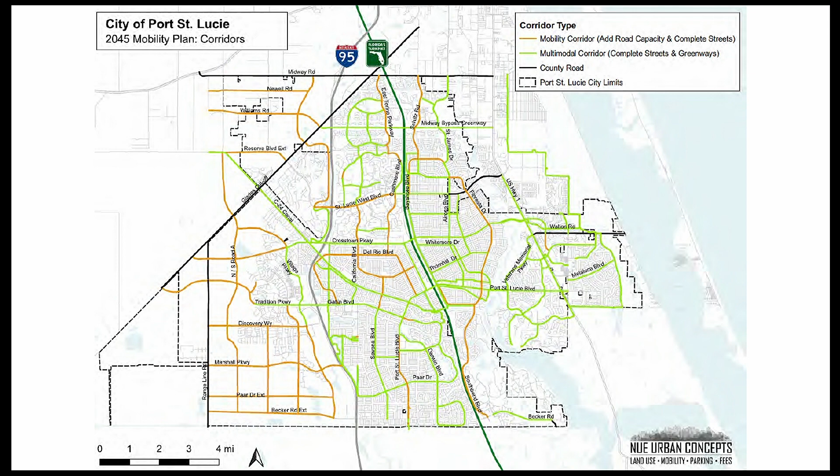Next slide, please. This plan gets into more detail, showing where we're adding a center turn lane, similar to what the city has done on Floresta Drive. The dark blue lines show where there's a proposal to 4-lane the roadways in the future. Ultimately, if needed, St. Lucie West and a portion of Village Parkway in the western part of the city are slated to be looked at for 6-laning in the future.

The orange color represents new complete streets, showing the entire gridded network that's been in place for years in terms of development, building that network as they move forward. In the future, there may be plans to 4-lane some of those roadways. The corridors shown in green are all areas needing multimodal improvements: sidewalks, bike lanes, multi-use paths. All of this is detailed in the mobility plan itself.

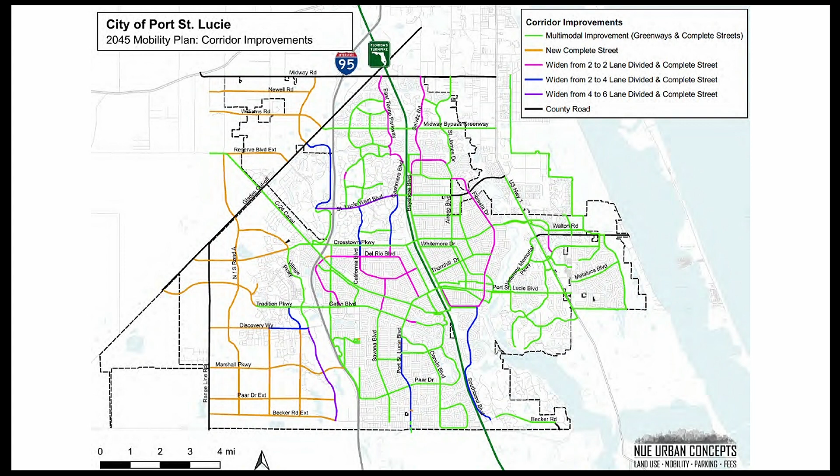Next slide. We also looked at establishing, in terms of getting around the community, what should be the principal multimodal routes within the city. That helped develop the overall prioritization. As the city looks at multimodal improvements, the corridors shown in light green or aqua are the main mobility corridors within the city. The secondary network, shown in dark blue, represents opportunities to expand or build those roadways and multimodal facilities — definitely important, but the backbone of the system is really those major corridors like Port St. Lucie, the Greenways, and portions of Floresta that the city is already improving.

Next slide. Jonathan, before we move on — this is Stephanie Morgan. What is the principle you're denoting there? You have the county roads as black and the principal routes as lime green, yet Glades Cutoff is cut off in the lime green with just a small portion in black for county.

We have, and that's something we've kind of left in there for discussion purposes — the longer-term potential to have a coordinated trail with the county along Glades Cutoff, not any type of roadway improvement, but a multi-use trail along that corridor. That's something we'll look at further. This map was intended to remove all the county roadways, so that may have been one of the corridors we need to go back and correct. We did have in the mobility plan a proposed multi-use pathway along Glades Cutoff, connecting those two major sections.

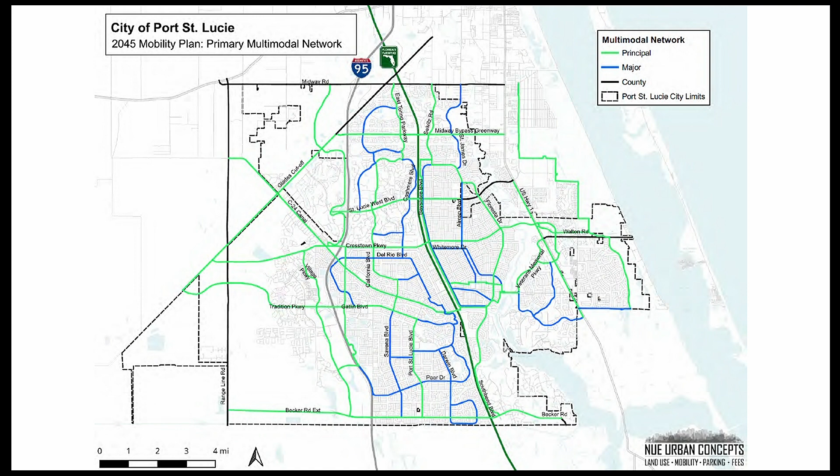This is a more detailed look into the overall mobility plan for the multimodal facilities. The prior map just labeled them in terms of priority, but this gets into the definition of where we're looking at a shared use path, a multi-use trail, a sidewalk, and a multi-use pathway. This gets into a lot more detail on those overall corridors and the type of multimodal facilities that are proposed, and again these are an ideal situation.

Each corridor will go through a separate design phase, and as they go out there and do right-of-way surveys and stormwater surveys, some of these facilities may have to change due to right-of-way constraints. But in the ideal scenario, with the right-of-way as we know it today, these would be the ideal multimodal improvements on these corridors. We'll also look at the Glades Cutoff to make sure that map is updated appropriately to not have a county facility on it.

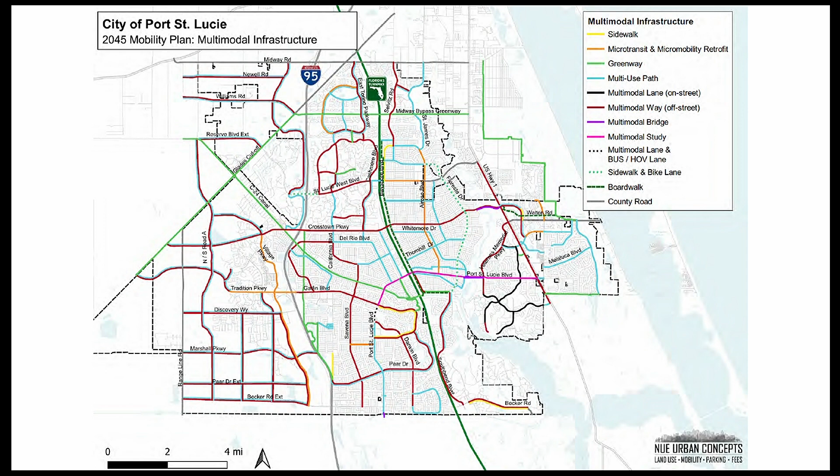We also looked at intersection improvements throughout the city, similar to the corridors. We identified ones that needed capacity improvements for cars, and ones that needed safety improvements for multimodal accessibility.

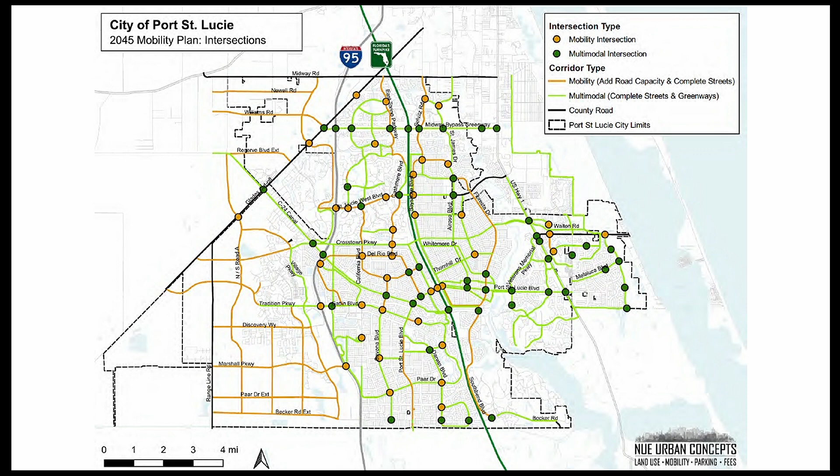Similar to the other maps, this is a much more detailed version. Road capacity, shown in red, is where there's an actual need for additional turn lanes. Orange is where there's a need for curb ramps, updated sidewalks, and other multimodal improvements. We also looked at roundabouts coordinated with Public Works at a number of intersections throughout the community.

And then longer term, we're still leaving in the possibility for a partial interchange at the Marshall Parkway and I-95 interchange at some point in the future, and also a revised interchange at Port St. Lucie Boulevard and the Turnpike, as well as some multimodal overpasses or underpasses as they make improvements to the Turnpike in the future.

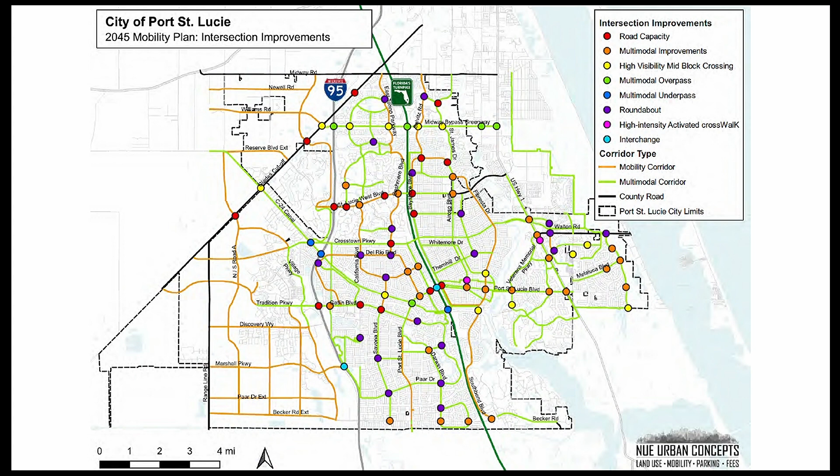Next slide. We also took a look at transit, not necessarily in the traditional sense of a 40-passenger bus, but something more in line with either a tradition shuttle or another type of service that a number of communities are rolling out, like neighborhood electric vehicles. Some people refer to them as souped up golf carts, but they carry up to 7 or 9 passengers, and there are private companies starting to run them within cities, also looking to run them on multimodal pathways.

So this could be a combination of that type of vehicle, a golf cart, or autonomous transit shuttles. We also looked at the possibility of using the St. Lucie River and existing canals to connect some of the parks and destinations within the city on both sides of the river via a water taxi. This exists today in Fort Lauderdale and in the city of Tampa. We've integrated this, and it's starting to happen in the city of St. Augustine as part of their mobility plan. I also looked at Walton County and Seaside in the Panhandle as part of their mobility plan, also initiating water taxi service. This would especially help given Port St. Lucie Boulevard is not the most multimodal friendly corridor, and there's a great opportunity to use a water taxi service to provide multimodal access across the river to some of the destinations and redevelopment planned as part of the city.

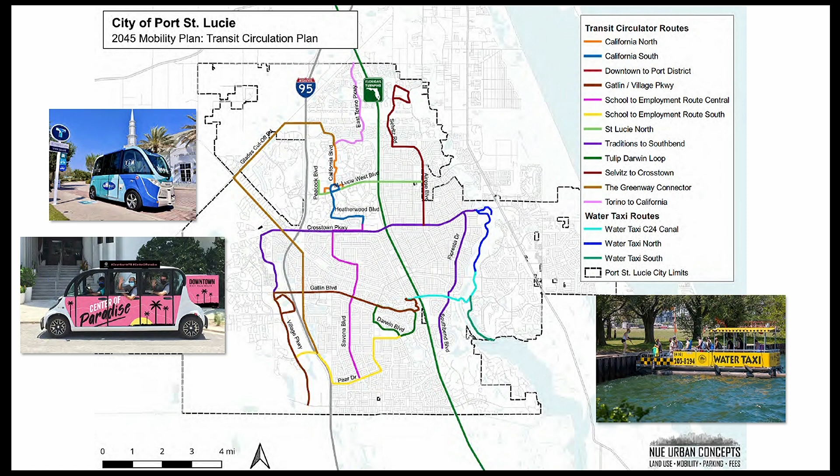Next slide, please. Go ahead and go into the next slide.

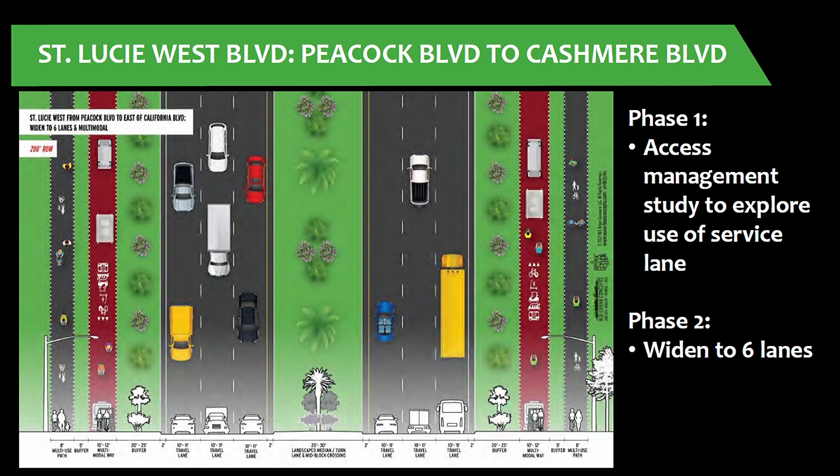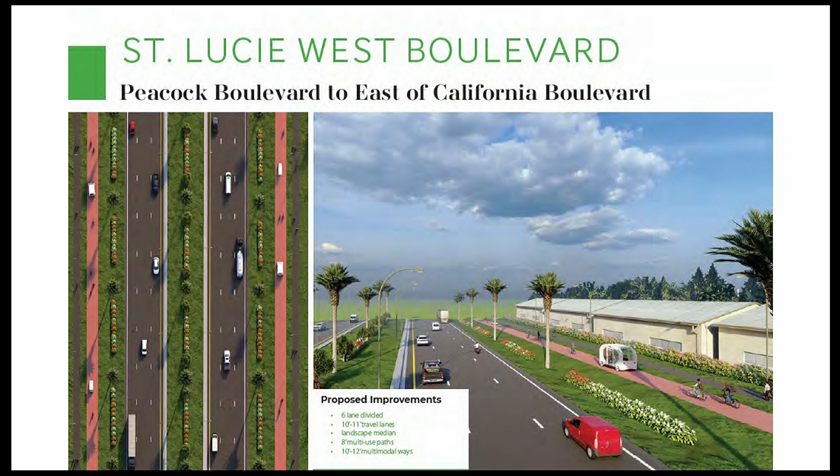Next slide. This is an aerial view of what the 6-lane facility could look like, and also a rendering of St. Lucie West in an idealized version. Next slide.

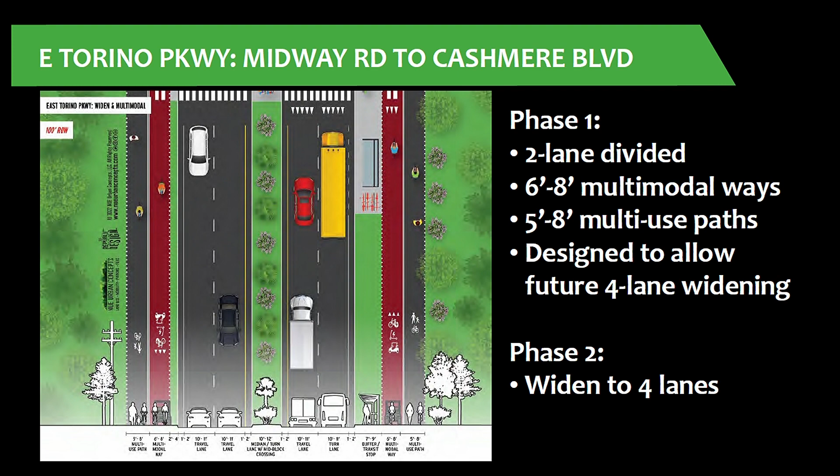East Torino: the mobility plan calls for a 2-phased approach. The first is to look at adding additional multimodal improvements to the corridor between Midway and Cashmere Boulevard, and should future volumes warrant it, look to ultimately 4-lane that corridor as well, if traffic dictates such. Next slide.

Again, we have renderings and aerials of each one of these, and they are detailed in the mobility plan itself. Next slide.

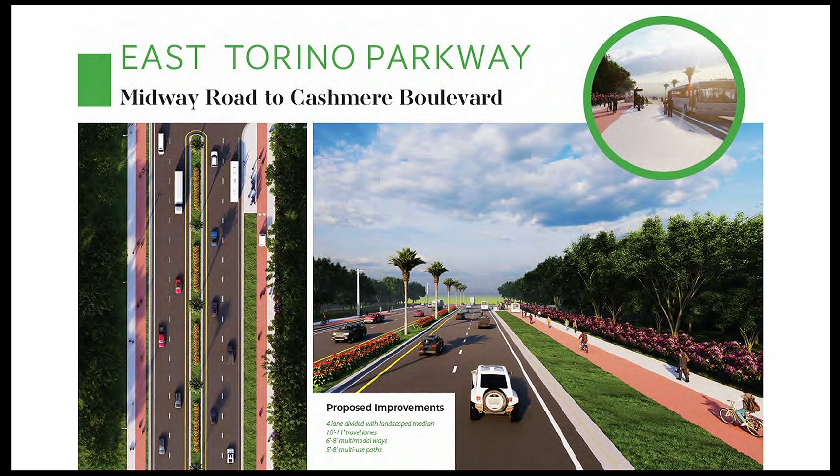Cashmere Boulevard is one that we looked at from Pleasant Grove to Peacock as a potential to 4-lane in the future. We don't necessarily know if that's going to be warranted. So in the interim, I think a 2-lane divided would carry quite a ways and carry quite a bit of traffic.

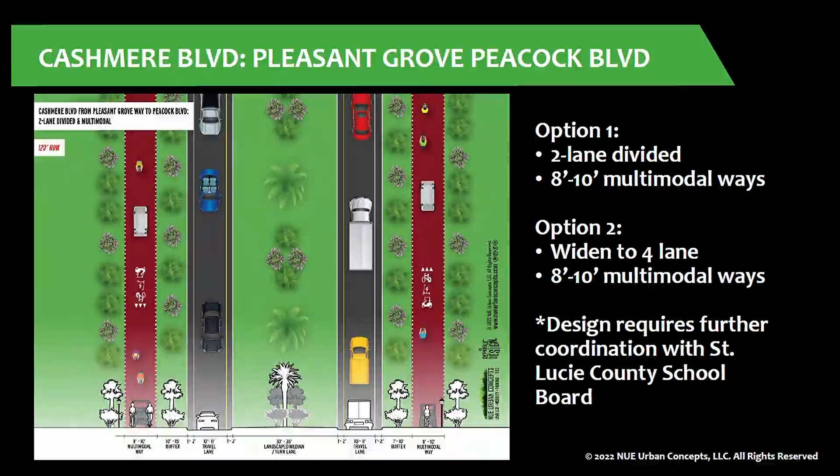These are just renditions. South of the Crosstown Parkway, we talked with Public Works. Because there are a number of schools out there, initially we did not have this corridor identified as being 4-laned, but in looking at the traffic volumes and the schools and future need in the area, we are recommending and have included the 4-laning of Cashmere from St. Lucie West Boulevard to the Crosstown Parkway.

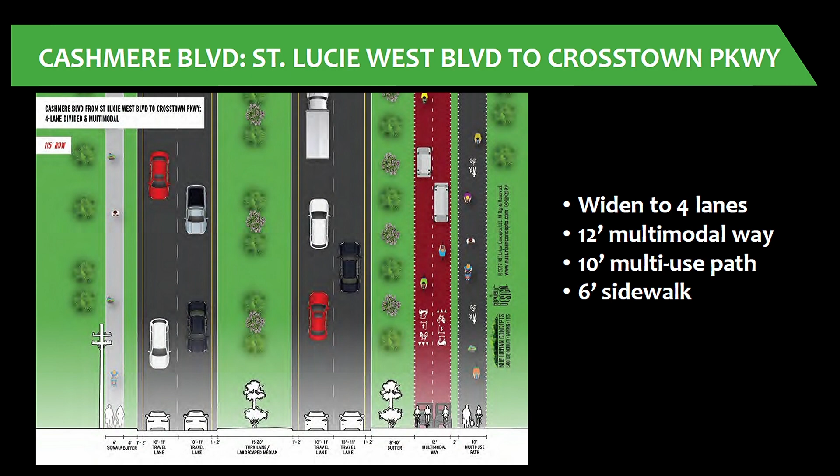And this is just a rendition of what that would ultimately look like in the future.

Southbend, we looked at a couple of different options. Phase 1 would be to add the multimodal improvements, and then ultimately in phase 2 convert that roadway into a 4-lane divided facility. Where there's ample right-of-way, the facilities for multimodal should be separated. But where the right-of-way is more constrained, we have to have joint use facilities.

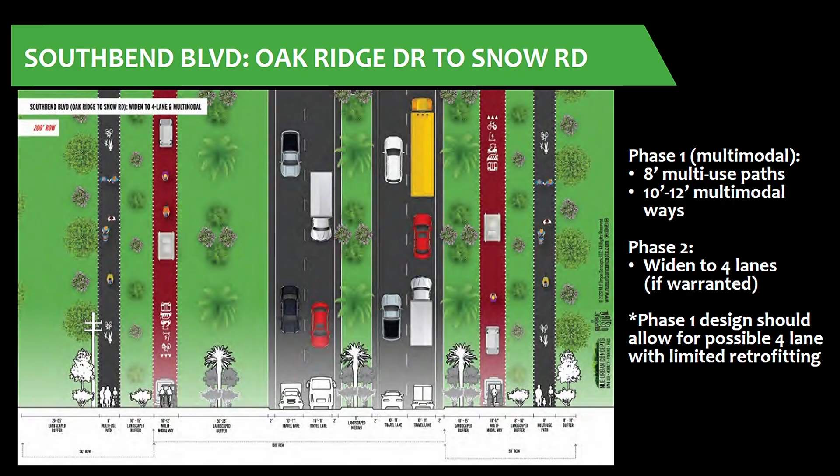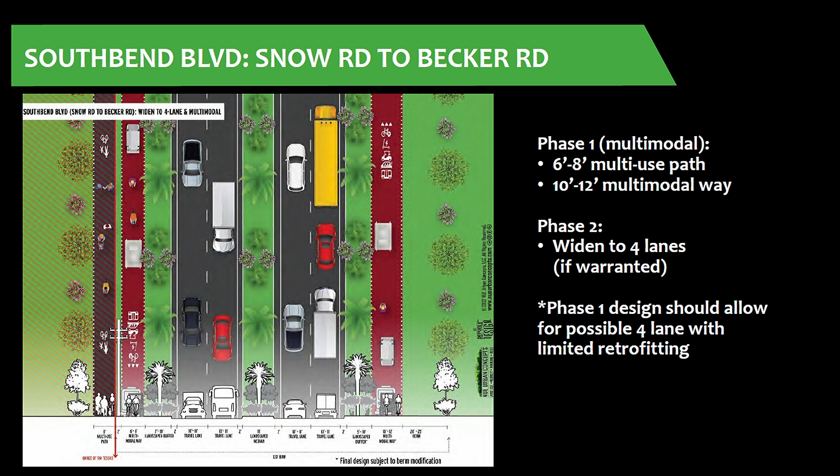Again, an idealized version of what this facility could look like. And then in a portion of where the right-of-way becomes more constrained, you may have to combine those types of facilities as you go into further design.

We also looked at Bayshore Boulevard. This is one that's gone back and forth a lot. It doesn't have the volumes to necessarily trigger a 4-lane in the future, and it also has a fairly compact right-of-way. So we coordinated with Public Works to have a 2-lane facility with 6-foot sidewalks on both sides, and also wider paved shoulders that could serve both bicycle traffic and offloading and unloading of delivery vehicles. And then where room does allow and there aren't a lot of driveway conflicts, either providing a raised median or some type of pedestrian refuge as part of roundabout improvements or along the main line of the corridor.

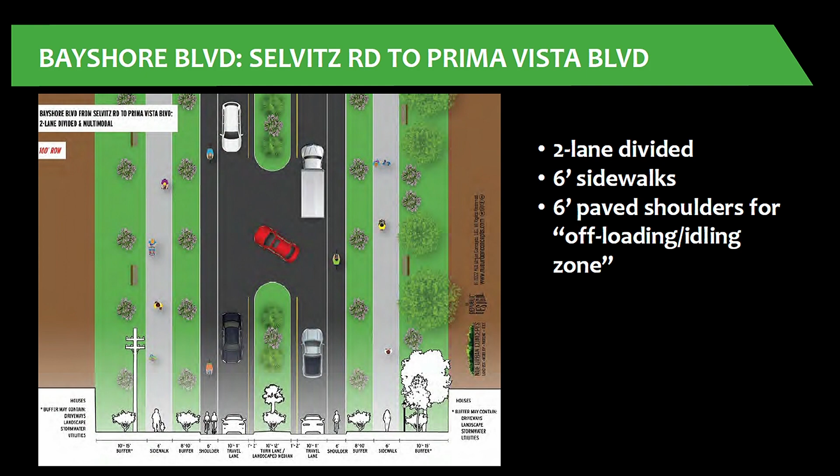And this is just a view of what that could be. We've also included a detailed analysis of level of service, both for vehicles as part of the mobility plan and also for all multimodal facilities within the city.

This will really help to serve, the primary purpose of this is to give a snapshot in time of what the city's services are today, what facilities exist today. And this will allow the city over time to actually evaluate and calculate how many miles of sidewalk they added, how many miles of bike lanes, and where they've actually made improvements in the overall quality of the environment for people walking and bicycling.

The city itself has various policies related to speed limits. We have established at least a process that the city could consider additional lower speeds on residential streets if there are actually improvements made to those corridors that narrow those roadways to get drivers to drive slower speeds. Now, this is something that would really be a follow-on effort through the Public Works Department, but the mobility plan laid the groundwork for retrofitting some of your existing local roads to make those also more pedestrian and bicycle friendly.